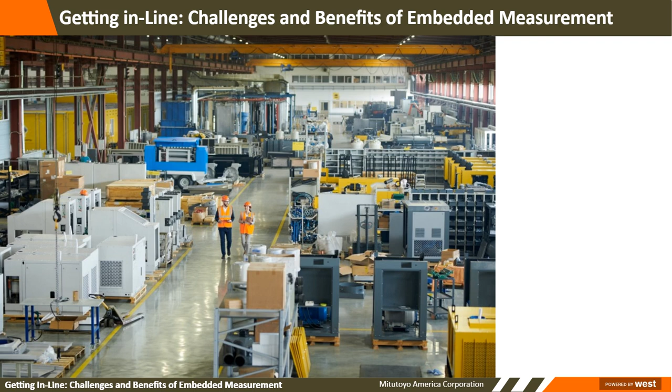So this is a little bit about the challenges and benefits of embedded measurement, and we'll move right on to the first slide. So the first thing is embedded, as part of the header. It is an object or something actually inside of some kind of cell.

And the first question I always ask: do I want to create a system that's inline or embedded? I always ask someone why. There's a number of reasons. Number one, of course, is cost savings. Very important to save costs in today's world. We certainly can see some time savings as well, we'll speed up the process. And then throughput improvements. So all of these together are certainly three of the main factors we want to talk about when we talk about embedded measurement and even line side measurement.

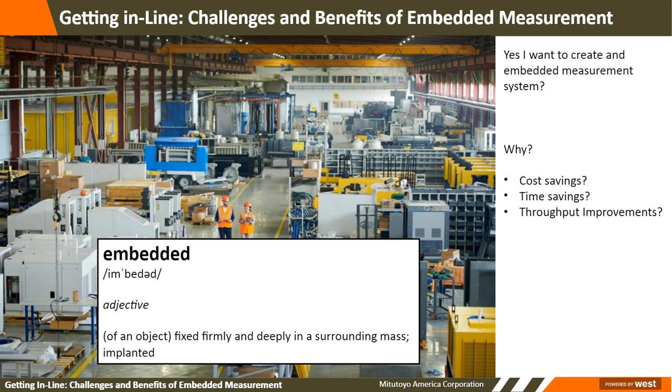So with that being said, we make a definition of: is the application going to be inline or nearline? And those are two specific differentiators. Number one, inline means it's in a production machinery line, and nearline means it's line side, or beside the workpiece or beside the actual measurement process.

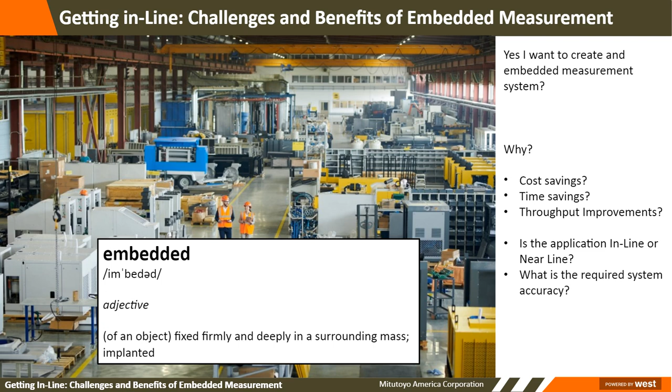And last but not least, we do want to know what is the required system accuracy. Pretty important when we're trying to push a machine onto the shop floor. And this is a lot of people's goals these days, is to bring it from the current location, which is in the quality lab, out onto the shop floor, so that we can actually get embedded and/or line side type measurement.

We do have a process when we come to look at the entire task, and the first thing we want to do is define the current process. How are we doing it now?

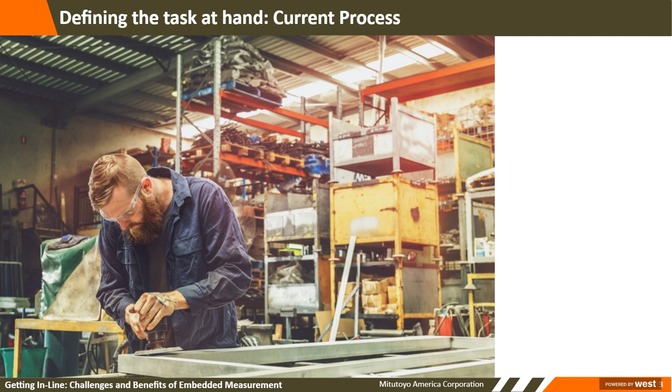We like to examine the current inspection methods. So we're going to take a very close look at what we're doing in the form of part inspection, what measurements are currently being done, and what are the steps involved in those processes. Certainly the staff involved are really the people that we want to talk to.

So we ask the first question: how do we do it now? Who knows how we do it? Probably the most important question, because that person, if it's not yourself, is going to be highly involved in the selection of not only the task, but the equipment, or even to have that thorough, deep knowledge of the process.

Are the measurements that we're going to do, are they identified? Do we even know what we're going to measure at this point? What type of equipment is measuring it now?

So if we're talking about an inline challenge, are we going to go from a caliper or some kind of hand tool to a coordinate measuring machine or some other kind of device? It's a pretty big leap, and we've got to be real cautious about how we're going to compare and contrast what we're currently doing now into a new methodology, because correlation is at the very top of the list when it comes to making sure we're doing it the same and/or better.

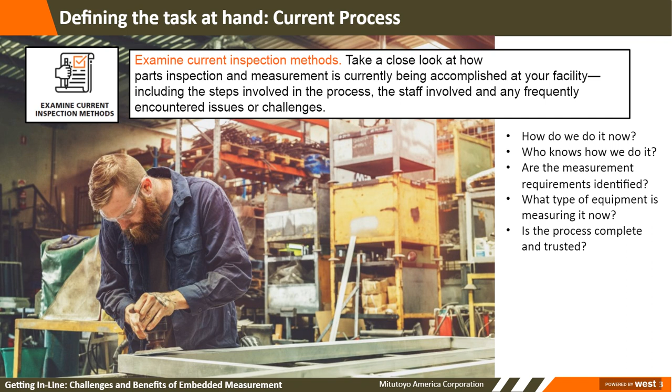So the next part of the identification phase is actually space. We talk to customers many times, and this is a real challenge in today's industry. We've walked into many facilities and there's things everywhere, and embedding a system in the middle of it can be a real challenge. So we want to determine that available space.

We want to take into consideration the flow of the measurements and how it's going to be done. Is it going to be done after process 1, after operation number 2, or between the grinding operation or the finish operation? Knowing that physical space and how big the equipment is required is really important. We want to consider custom engineering too. Do we have to fit into a certain space, or can we actually work backwards?

In many factories today, space is at a premium. We find people trying to find the smallest measuring solution possible, almost an exact part fit in some cases. So we want to choose a company with a wide selection of measurement sizes, if we're thinking about a coordinate measurement machine, to help you fit the system into that available space.

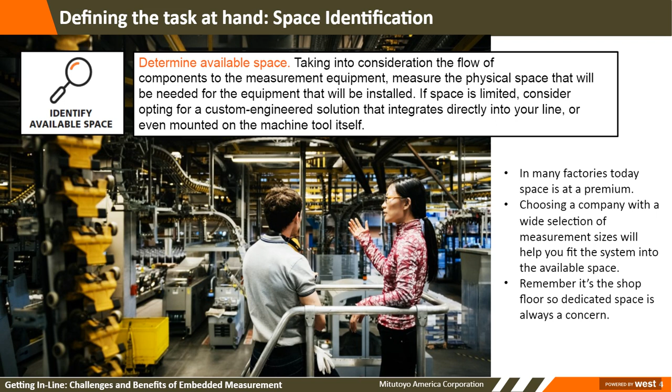Now we want to talk about some of the factors on the shop floor. There are always real challenges there. The biggest challenges are environmental factors: temperature changes, protection from debris, and vibration. Temperature variation is the most significant source of gauging error, so we want a tool that has a wide temperature range and a way to compensate for these temperature swings.

Back to environmental factors, this is a major factor in the entire process examination. Number one, I think, is temperature. Shop floors are not like calibration labs or quality labs, so machines either have to have the ability to adapt to the temperature constraints, or we have to think about putting them in an enclosure to keep a consistent temperature.

The next one is vibration. When we embed systems, we may find that some have handling equipment that causes a lot of vibration. We have to think about the machinery too: is it a mill, a lathe, or a stamping machine, which is probably the worst machine we could have for vibration?

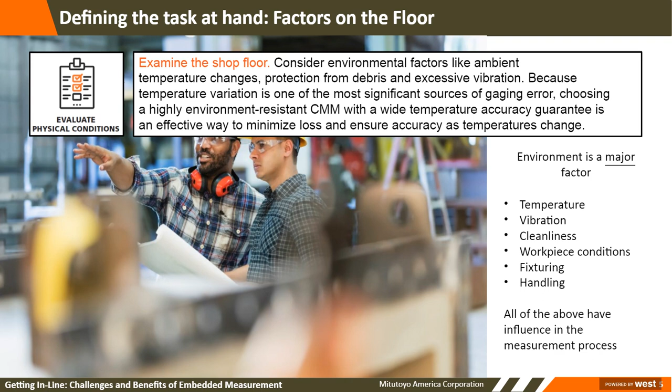Of the workpieces we see in line, cleanliness seems to be one of the most challenging items. On very defined workstations and work processes, we actually have a cleaning station that cleans the part with a combination of air and/or some solution, then air again, and the part is presented to us for measurement after it's been cleaned. All of these factors have a great influence on the measurement process, and if there's one step I could tell you is probably the most important, it's really examining the factors and conditions of your part, your workpiece, your floor, and handling and cleanliness.

We'll move to the next operation that we talk about, and it is the need for training.

So we have to determine what need this is. If we're moving away from the inspection and measurement process in the lab, which is typically done by programmers, specialists, engineering staff, or quality assurance, we may need to provide training for the individuals who will be responsible. In this case, we'll talk about a CMM on the shop floor. They may not have the same expertise that the people in quality or engineering staff might have with the equipment. So certainly the need for training must be addressed, and it should be part of the discovery.

So what is our current level? We want to measure that, or at least ask about it. Do you know how to use this piece of equipment? Have you used this equipment? Are you familiar with this? Where are you in the process of knowing? This could make a big difference on what kind of measurements we get.

We always try to examine the most important factors, and some of those are: do we have experience or training in automation? If we're going to do a full embedded cell, there is going to be some automation, whether it's moving the part around, holding the part, clamping the part, the pick and place procedure, or a conveyor system. Automation is going to be a factor in an embedded system.

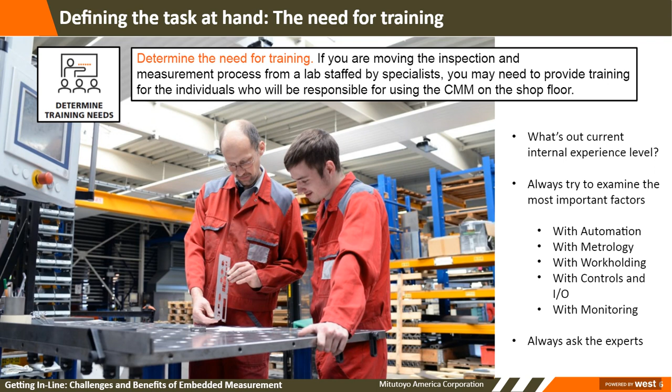And I always say at the end, ask somebody who knows, or ask what I call the expert. If you don't know, are you reaching out to the proper company? We'll talk about this a little bit later. But in general, who knows this? Does anyone in our company? And if not, how do we get that knowledge?

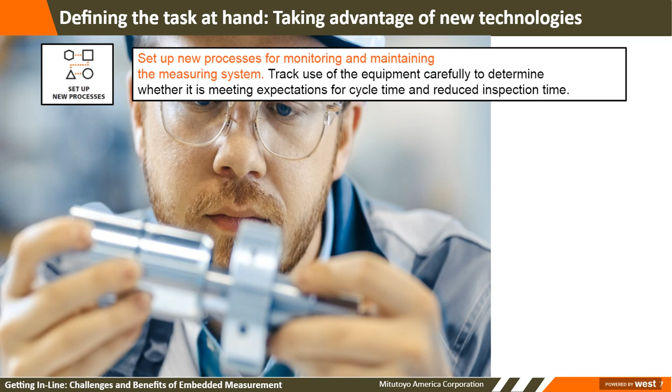So next we want to define the task at hand, which is to take advantage of new technologies. This may be an opportunity to actually set up a new process for both monitoring and maintenance of the measuring system. We can track the use of this equipment and determine whether it meets the expectations of the cycle and the reduced time. Part of it is to try to take advantage of new technologies. So if you're starting a cell from new, you can investigate the new technologies. They probably will lead to what we call favorable results.

So I always ask a bunch of questions. Is there something that's faster? Most likely. Better? Probably. Smarter? Definitely. And then we always say, is it future expandable? Can we add this to another process? Can we use this somewhere else? Can we add more to this?

And those things really help us define the return on investment when we're talking about buying a new system or even thinking about integrating a system. We want to think if there's something new that will help us understand that. Certainly we'll want to look to see if something's easier to set up and integrate, and there's always something more plug and play than in the past.

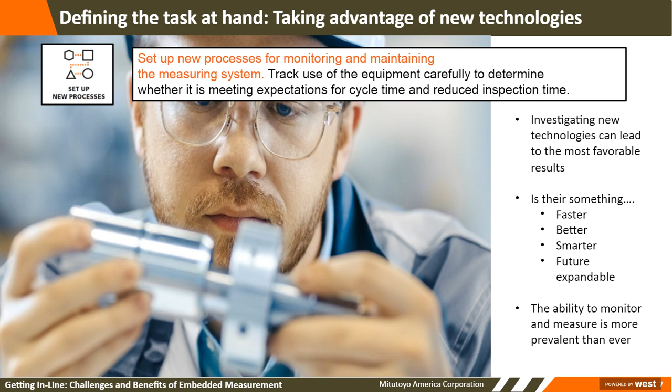The ability to monitor and measure is more prevalent than ever. If you buy a machine tool or production equipment today, you'll see how much the monitoring and measurement capability has changed greatly, even over the past 3 or 4 years. All these machines are smart machines now, so in this process you really should pick a smart machine.

So we'll talk about smart systems and explore that capability of smart manufacturing. It may be possible to fully automate the process of identifying errors, so machine tools will automatically adjust based on inspection outcomes. This tells us that...

Once we measure, we can sort. We sort by good, we sort by bad. Once we know what this reading is with some consistency and statistics, we take this data and typically filter it because we don't want outliers, and we send it back to the machine tool to do offset to improve the machine tool's performance and get us back into a better process.

Fully automated systems are becoming the goal for many companies. Smart manufacturing techniques are closing the gaps with increased throughput, error reporting, uptime, data collection, and automated responsive actions. So not only does it measure, it also tells the machine tool what to improve.

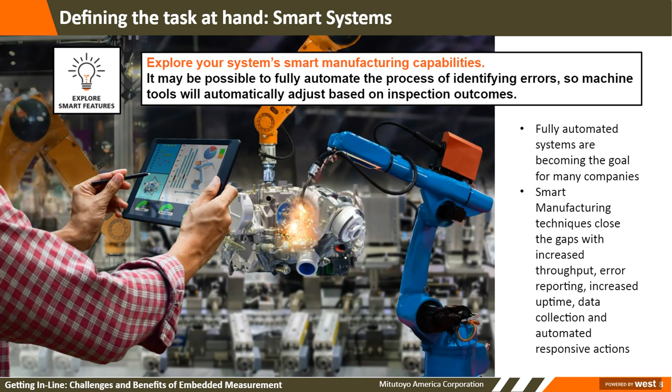The considerations we look at—we take the above steps, get those vetted out, and then come to some considerations. What is the system footprint and how does it fit in the cell? Again, back to picking a machine that fits, since there's probably not a lot of space.

One important factor is what kind of measurement technique is required—is it touching or scanning? In some cases it's even non-contact, which you'll see later. So many techniques are out there.

What I'd recommend is asking what method we do now. It'll be easier to correlate the studies to the current method than to change it. However, changing the method of data acquisition—turning to a new technology, for us generally scanning—may provide better results and more detail on the measurement system than we had before. That's the advantage of changing or buying a new system.

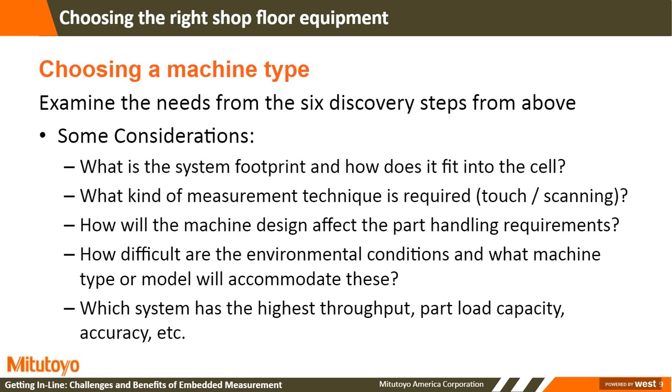It has what we call a smallish footprint with a good ratio of external size to measurement envelope, meaning it's not much bigger than the size it's measuring. So good size and really open access—multiple directions on the actual part, easy to access, and it should integrate well with fixturing and automation.

It has a lot of space. In the home position, you're less likely to crash compared to a bridge machine. It allows long workpiece measurement and wide part access—think of pushing a big, huge part and measuring just the tip of a wing of a plane. You could fit it in the envelope to measure, which a bridge style would not allow.

It has usually, and most of what we see today, are hard bearings, so that means it doesn't need air. It's designed with the shop floor primarily as its purpose, so it really is heavy duty and environmentally strong. It's an excellent near-side measurement platform as well, meaning I could load a fixture quickly from a machine tool, hit an execution measurement routine, and then pick that up. One way could be the operator, the other could be a robot, but it's a real flexible machine, and now finding favor in the industry. It's resuscitated itself from its early design.

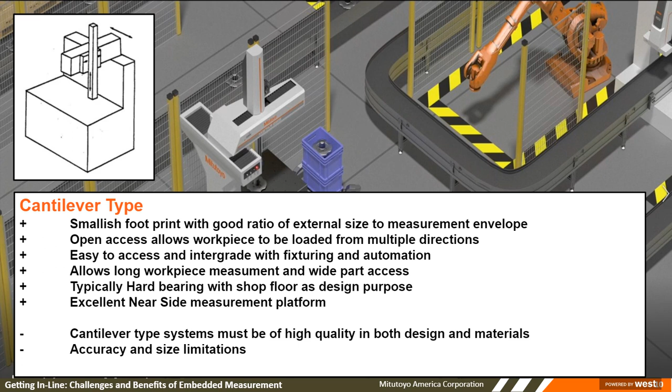It does have some accuracy and size limitations. The typical one in the industry today is about 500 by 500 by 500 millimeters, which is a pretty good size, but we've seen as big as 800 millimeters. So they're starting to get bigger, but right now you're probably in the 500 millimeter range of measurement.

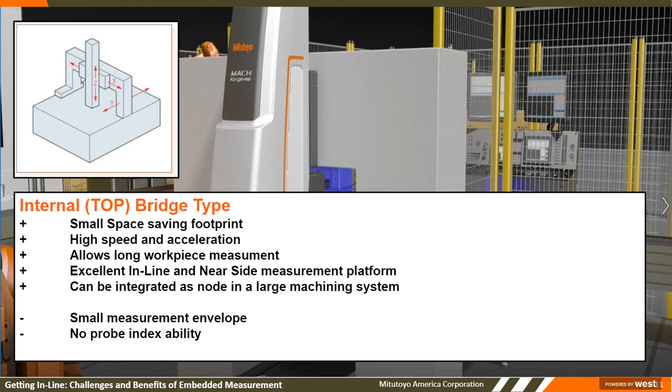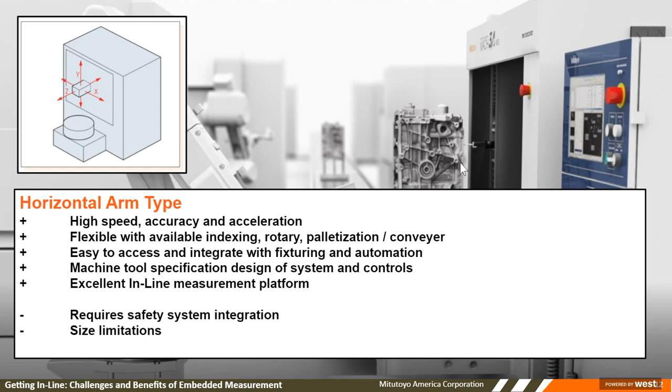We use either what we call fencing, or we can use light curtain, but we see fencing way more than light curtain with this type of machine. There are some size limitations. This arm can only stick out so far before it starts having some bend inertia. When you're moving so fast, it also has some challenges being long and hanging out there as well.

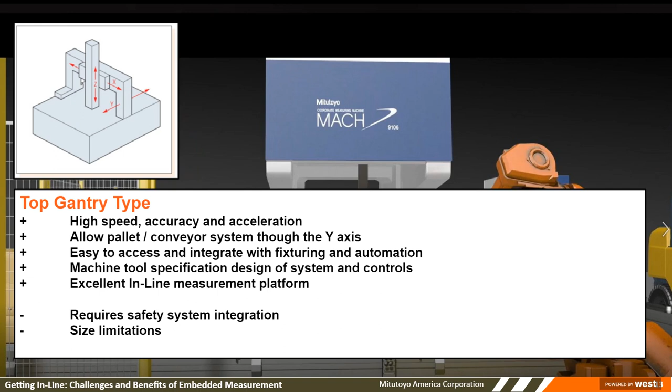So next slide we're going to go to, we're at the medium to end point of the presentation, and some of the things that people tend to forget in measurement—we now know about what we should do as a checklist. We then looked at some of the machines and their qualities that may be good for us to embed, but we always have some things we don't think about enough, and I'd like to review those.

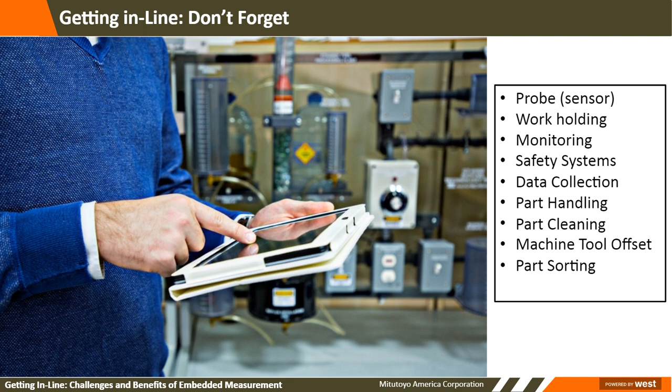And in our estimation, the robot always pays attention. If you have a really good plan, you can sort the part automatically to get it to regrind, or in many cases, we may have parts used for certain builds. So all the best parts go to this customer, all the medium parts go to 90% of the customers, and some of these parts still can be used for the third customer. We can sort appropriately when we bring all of these things, or a few of those, in place.

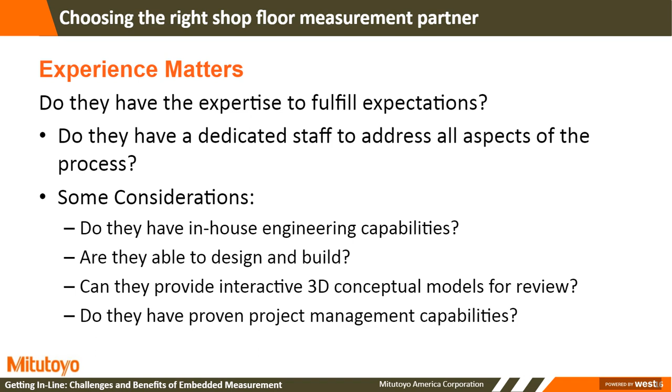So that brings us to the end of our webinar today. And again, my data is on the front here, but we got through it in a little bit better time than I thought. So I think at this time we can open it up for some questions.